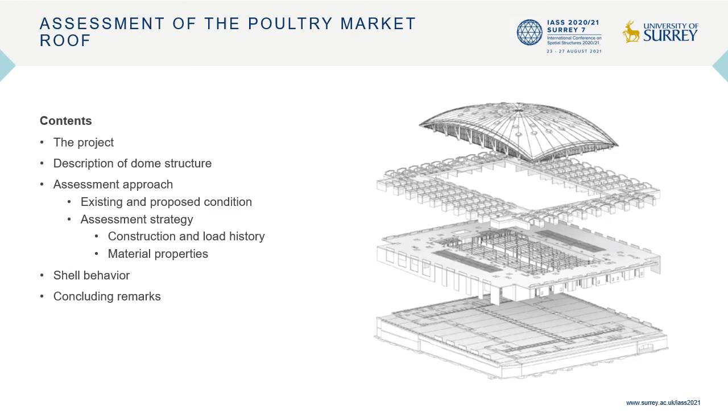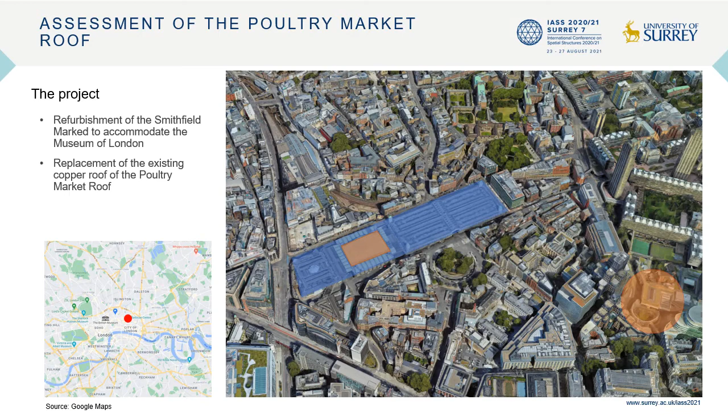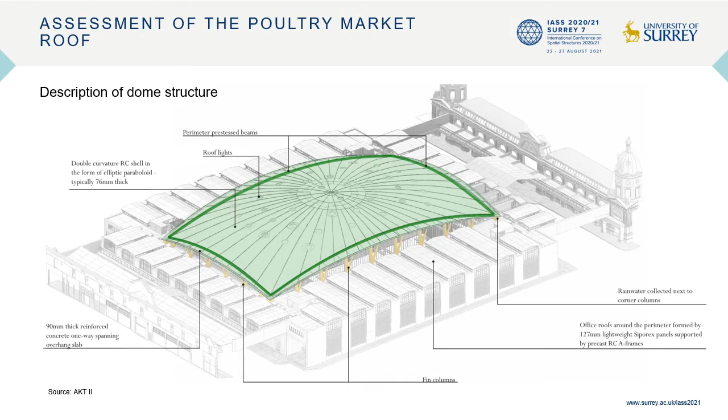In terms of geometry, the roof is about 70 by 40 meters in dimensions, with a rise of 9 meters at the center. The roof shell is about 75 millimeters thick in the center and 150 millimeters thick at the supports. It is supported by 4 edge beams, which in turn are supported by 4 columns, and there's an overhang slab picked up by inclined columns.

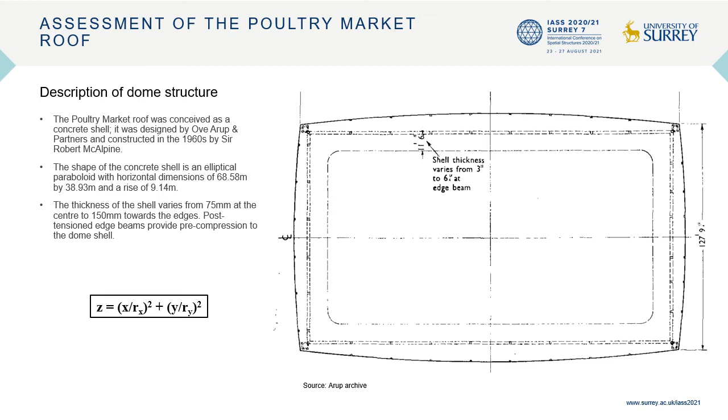On plan, this is how the roof looks. It was originally designed by Arup in the late 50s and then executed by Sir Robert McAlpine. We've been fortunate to have some reinforcement drawings as well to feed into the analysis and assessment of the roof.

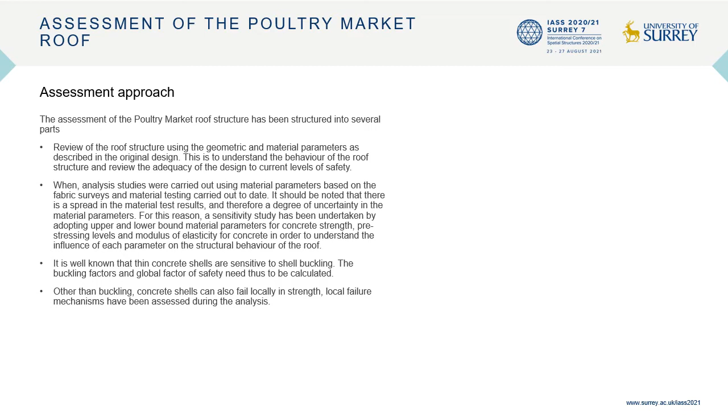In terms of the approach, we looked at it using the original design and geometrical parameters, and then in the first stage and the second stage we also looked at the results of a fabric survey, and particular checks we've carried out are determining the buckling factor for the dome shell and checking local failure of concrete.

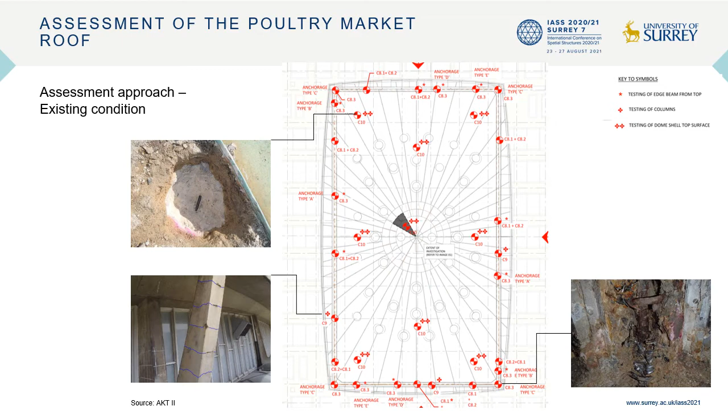To determine the current condition of the roof, we've carried out extensive fabric survey studies to determine Young's modulus, concrete strength, and pre-stressing level in the roof. We've also done a point cloud survey to see if there have been any large deformations of the roof surface, which doesn't appear to be the case. It is pretty much in its original intended position.

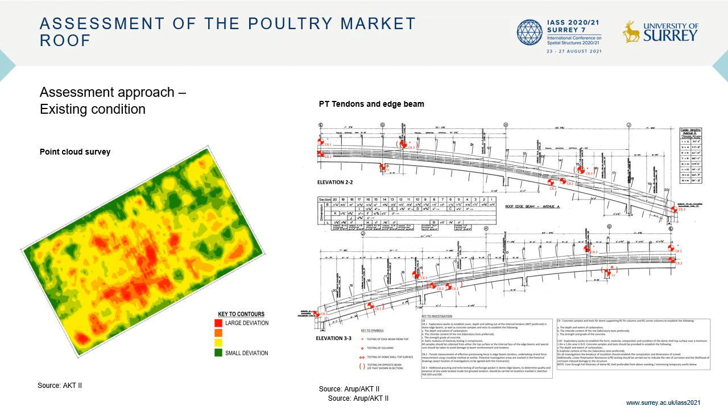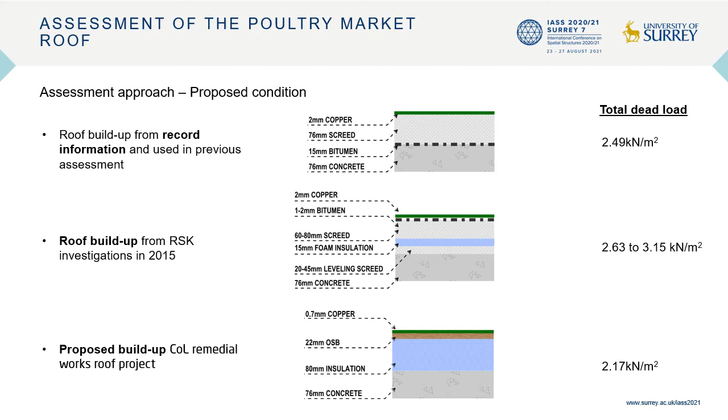And on the right hand side you can see locations where we've carried out pre-stressing samples of the tendons. As I said, it's the intention to replace the existing roof. Here are the build-ups of the original design, refurbished build-ups, and the proposed one. The proposed build-ups will be below the original design allowances. It should be mentioned that the refurb roof loads are higher compared to the original design allowances.

In terms of the procedure, as I said, we had 2 stages: determining buckling factor and checking local failure. So we've done this for a base model using the original design parameters and upper and lower bound models, using a 20% increase and decrease in material parameters from the best estimates from the fabric surveys. So that resulted in analysis of 28 models for calculation of the buckling factors, which were then also used to check the local failure of the concrete.

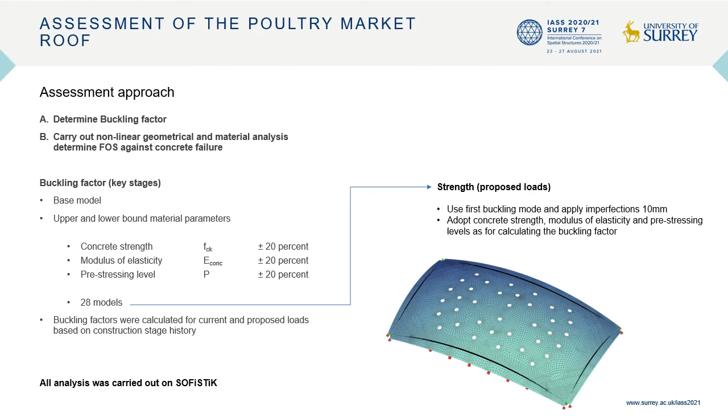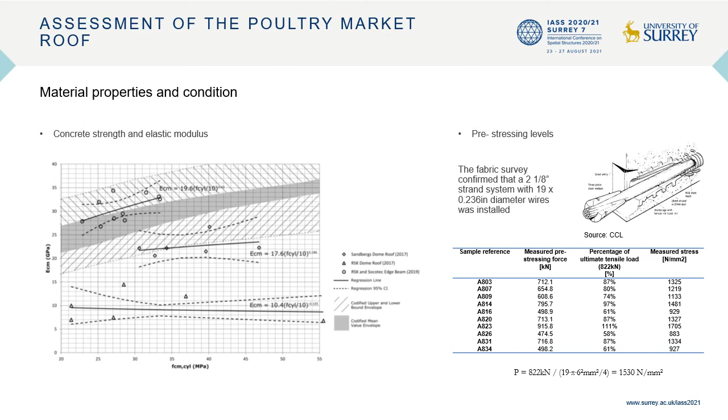Here's a summary of the determination of the concrete strengths, mean strengths, and the Young's modulus based on various fabric surveys, and the pre-stressing levels determined on site through site testing, compared to the ultimate pre-stress loads.

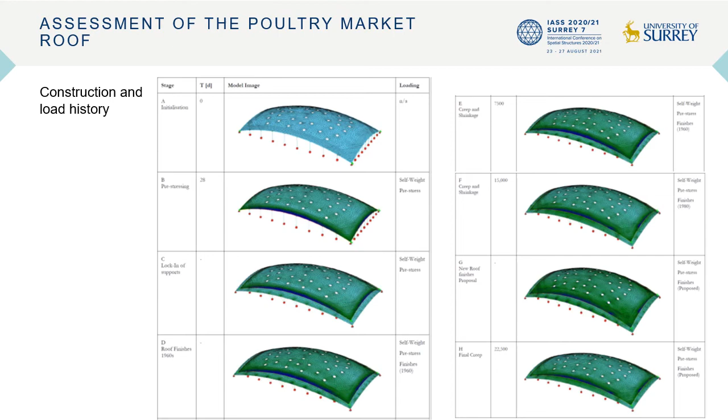So during the analysis we used the construction stage history to model the construction and the pre-stressing as described in the literature. There are a couple of ICE documents which describe the construction and the design of the roof. And then we also considered creep and shrinkage and the roof replacement in the 1960s to determine the loss of pre-stress within the roof levels, and also estimate deformations of the roof.

In terms of the outcome of the analysis, the buckling pretty much in all scenarios happens in the corners. So the first buckling modes are in the corners, and then the further buckling modes start off at the corners and are of larger extent.

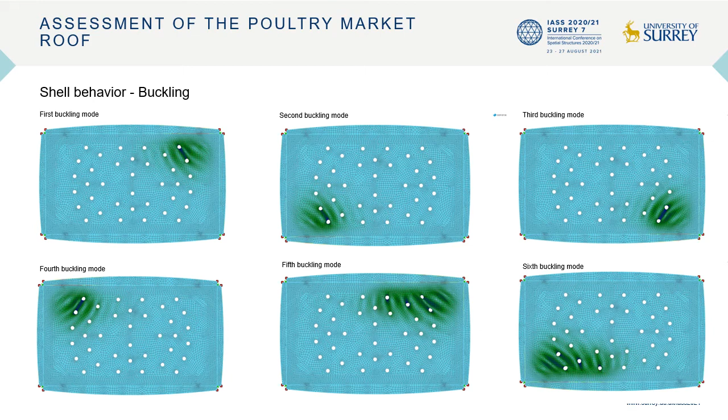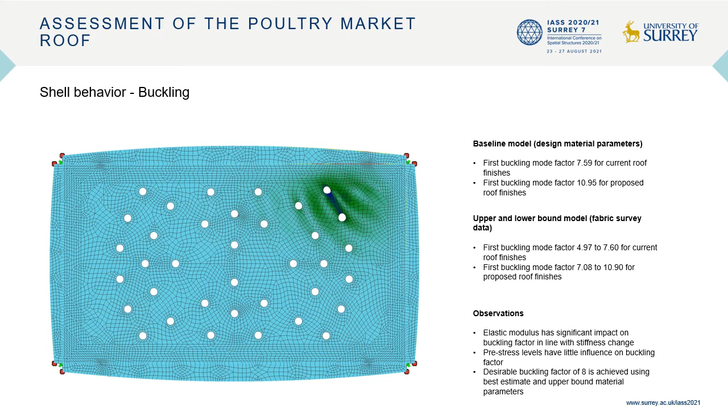In terms of the results of the buckling factors, the range for the base model is between 7.5 and 11, and for the upper and lower bound models between 5 and 10. It should be noted that the lower ones are using 20% stiffness reductions compared to the best estimates. Overall, we achieve a buckling factor of 8 using the best estimates and upper bound material properties. In terms of behaviour, the Young's modulus has the biggest influence on buckling factor, and pre-stress has very little influence on it.

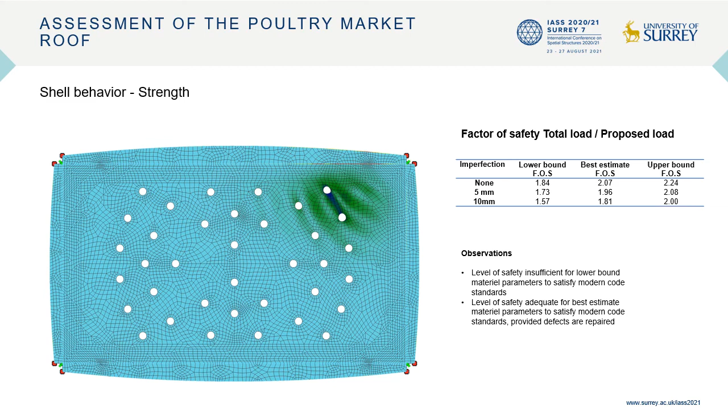In terms of strength, we've determined the factor of safety of total load over proposed load by doing, in quotation marks, a pushover analysis. It appears for the best estimate material properties that the shell achieves adequate factors of safety to satisfy modern codes.

In summary, concrete shells are very efficient structures which provide opportunities for reuse of buildings, in particular in the current environment where we should avoid demolishing buildings. Overall, using best estimate material parameters, we achieve buckling factors and local failure checks to modern code standards.

In terms of further work, we need to do further studies to consider the unloading and reloading during the replacement of the load, because it's asymmetric. And then a final comment on the recommendations for reinforced concrete shells. It seems a bit outdated considering it was written in the 1980s and that codes and analysis methods have moved on.